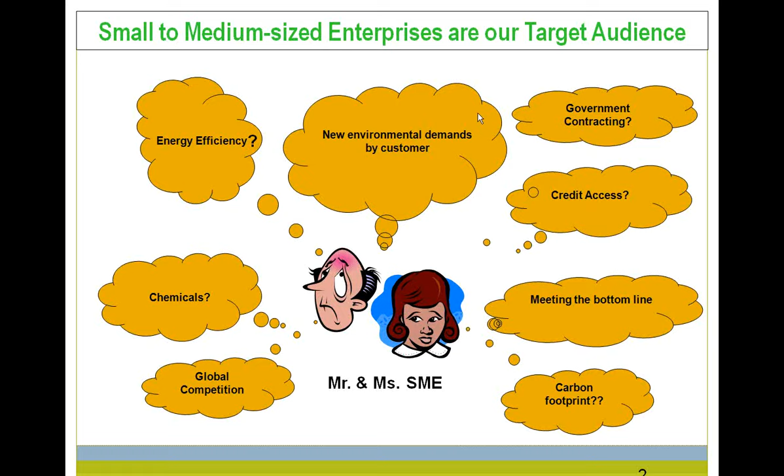I'd like to start our story by talking about the audience that we typically deal with on a daily basis, and that audience for much of our program here are the small to medium-sized enterprises, or SMEs. The reason why we deal with these small to medium-sized enterprises is because they really do need a lot of technical assistance. Many of them are very small companies down within the supply chain dealing with a variety of different issues that you see in the clouds here. I think some of those issues are expanding, and with each coming year there are new things they have to deal with, and they're often looking for technical assistance from a variety of sources, not only industry but also from the federal government and state governments. So that's primarily where we focused our attention.

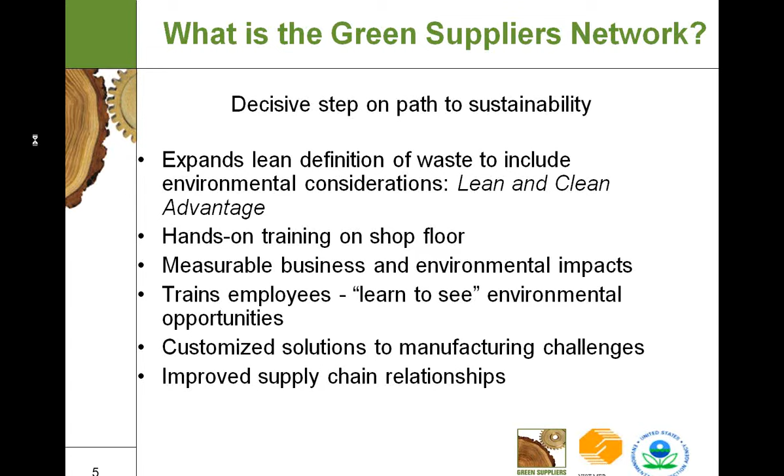And it also is a way of improving supply chain relationships between them and the customers that they provide their services and products to. An offshoot of our earlier efforts, and this is an organization that many of you on the phone know about, you're members of, is the Suppliers Partnership for the Environment.

and our various databases, etc., with industry. This particular organization is now anchored by Chrysler, Ford, and General Motors, and more recently just brought on Subaru, Nissan, Hyundai, and Honda as the original equipment manufacturers. But the real power of this group is the fact that at one table you have small to medium-sized enterprises and original equipment manufacturers that can deal with and discuss a variety of different environmental issues.

So this group meets on a quarterly basis. It's also the foundation for work that we're now doing through the CEC in Mexico, and also beginning conversations in Canada to green the automotive supply chain.

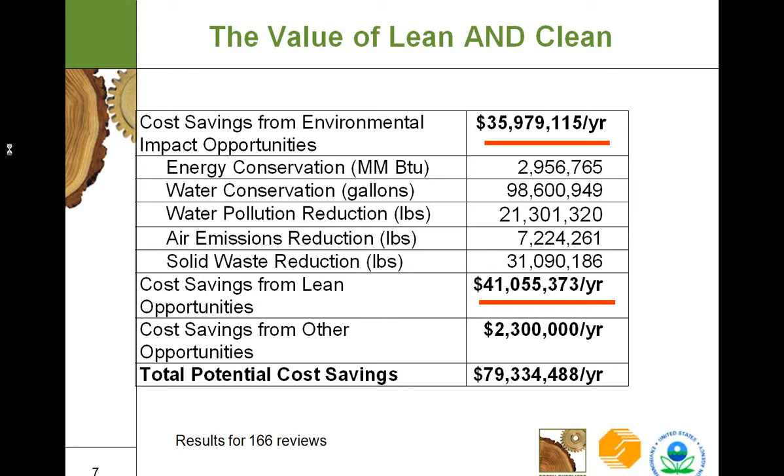Steelcase took this information. They've done two things. One is they've taken it globally to all of their plants around the world on this particular process so that they can benefit as well. And they also then took it to their supply chain so that their small suppliers could benefit as well.

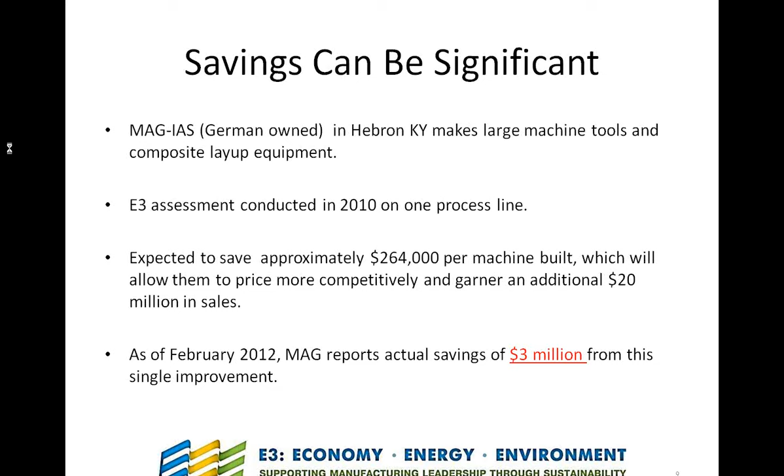Here's another example in Hebron, Kentucky, where Green Suppliers Network was done again. Assessment was done again at a very large company, MAG IAS, in this particular situation, and one recommendation from one process realized for them $3 million a year just from one particular improvement, and you can see what that meant in terms of future sales for them as well. So it's a concept that seems to work quite well. A lot of companies have been using the Green Suppliers Network and continue to do so.

But this journey to sustainability doesn't sit still very long, and a lot of companies out there found that they needed something different, better, more expanded. So we responded to that with a new framework that we call E3, or Economy, Energy, and the Environment. And basically at the core of E3 is the Green Suppliers Network, Lean and Clean.

What we have done is reached out here in the United States to a variety of other federal agencies, all of whom are working with small to medium-sized enterprises on sustainability efforts, and we've simply brought those together. We've always worked with Department of Commerce, with NIST, the Manufacturing Extension Partnership, but we've also added now the Department of Energy, the Department of Labor, the U.S. Department of Agriculture, and the Small Business Administration.

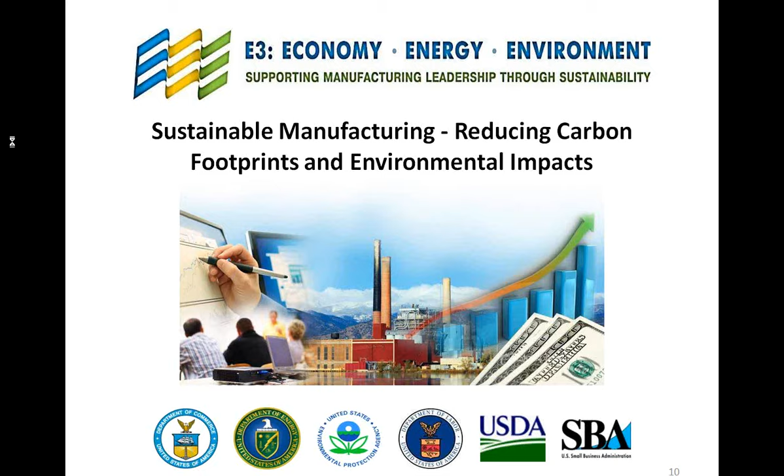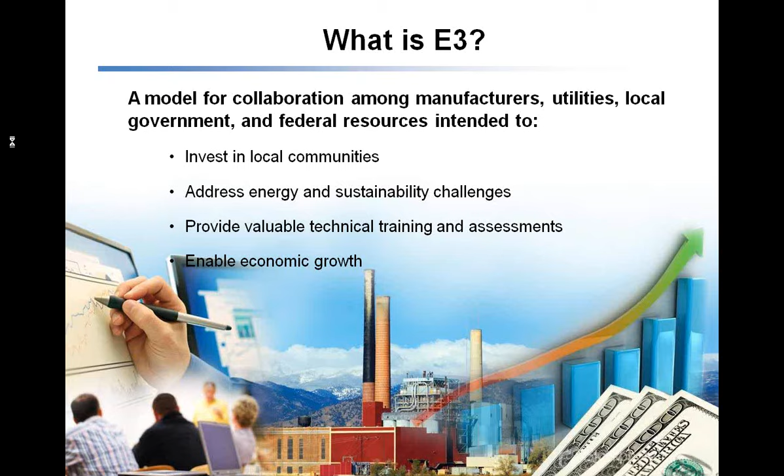So all of those agencies now are working together at the federal level to expand this Lean and Clean to something bigger. We like to think of E3 as a model. It's not a program. We call it sometimes a framework, where we can bring together people, manufacturers, utilities, local governments, and the federal resources I mentioned. It's a way of communities investing in their local manufacturing base, addressing sustainability issues, and helping those communities and manufacturers grow.

It's a novel concept with a very simple idea: the less money manufacturers spend on waste, the more money they have to spend on hiring new employees, adopting new innovations, or expanding markets. One example is a small company in San Antonio, Texas, that found, having had an E3 assessment conducted at their facility, that they were spending entirely too much money on energy. After responding to the recommendations from E3, they brought that in check, and they were able to triple their workforce over the course of about 6 months. So again, a very simple concept that can have significant value to manufacturers.

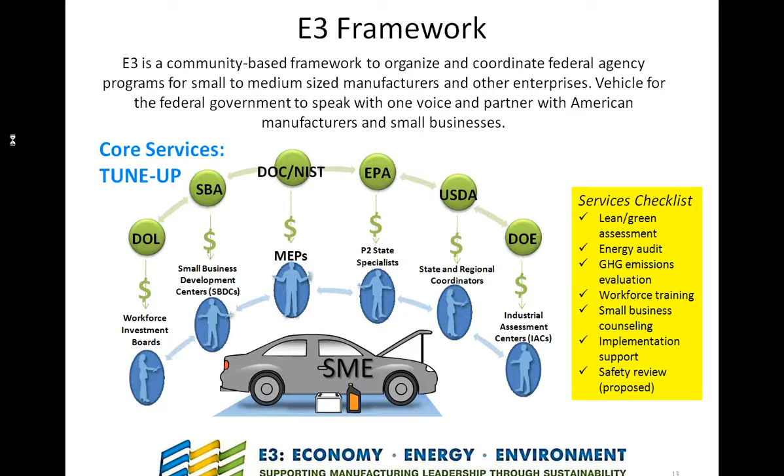So all of those organizations come together, they work with the local manufacturing base, and then they basically provide to those companies what we like to think of as a tune-up. Through the framework, using our Manufacturing Extension Partnership program and other technical assistance providers, we help companies—some of which we're moving from survivability to sustainability—and as we work with them on a continuous improvement kind of operation, we take them from basic sustainability up into situations where they free up enough capital to become more innovative, expand their markets, hire more people, et cetera.

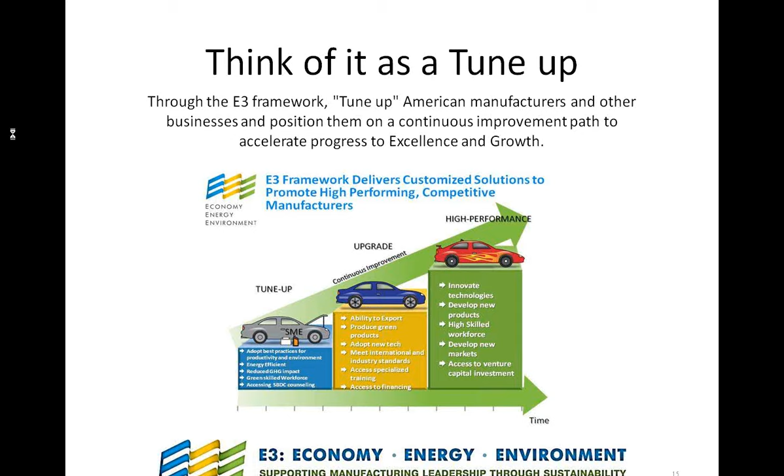Benefits for manufacturers are pretty straightforward. I've mentioned the cost savings. It has, for many manufacturers, increased their competitiveness, created jobs, and continues to create jobs or helps companies retain jobs. It also provides access to a variety of technical and financial resources, not only those that might be available, say, through the Small Business Administration, but also financial resources in the form of rebates from local utilities as companies begin to upgrade their energy usage.

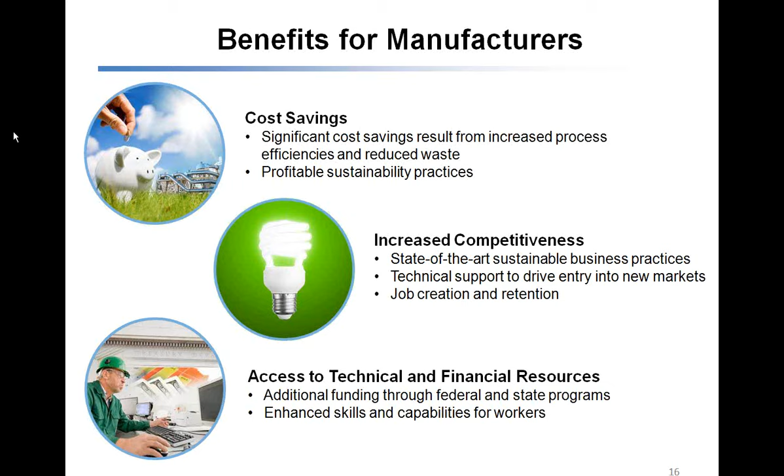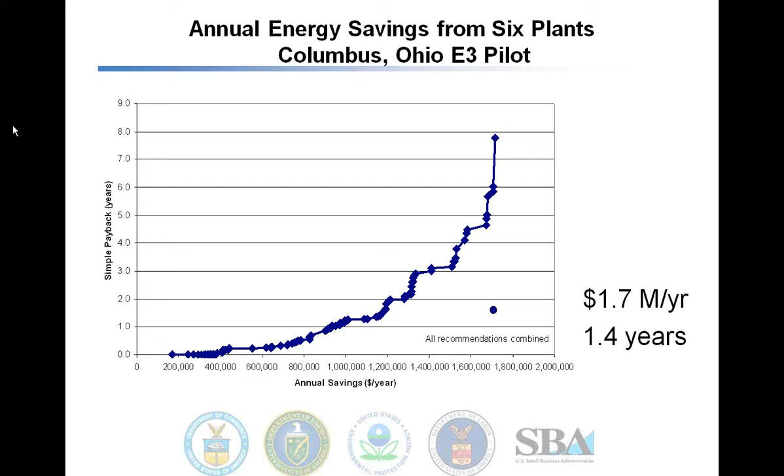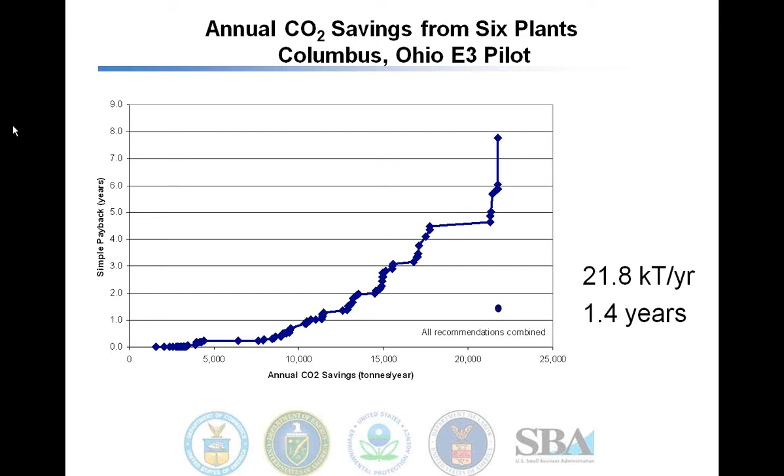Just a couple quick slides. I put these up to show the return on investment. Each company that becomes part of the Green Suppliers Network or E3 pays a modest amount for the assessment, kept low because of how it's subsidized in the United States. In Columbus, for 6 plants, an energy audit predicted these companies would realize $1.7 million a year, with that return coming within just over a year. The same holds true for carbon dioxide, so a 1.4-year return on investment is very acceptable.

I wanted to bring you back to this slide to show you that by doing an E3 assessment, where we do a much more expansive energy audit, and predicting results if we looked at the 166 companies we had earlier, the Department of Energy said we would probably see another $40 million per year. So we're now doubling the lean benefits, making the value to companies much more substantial.

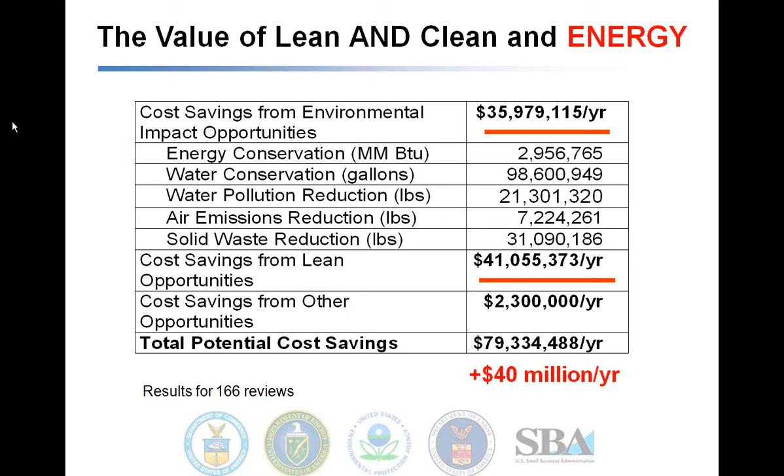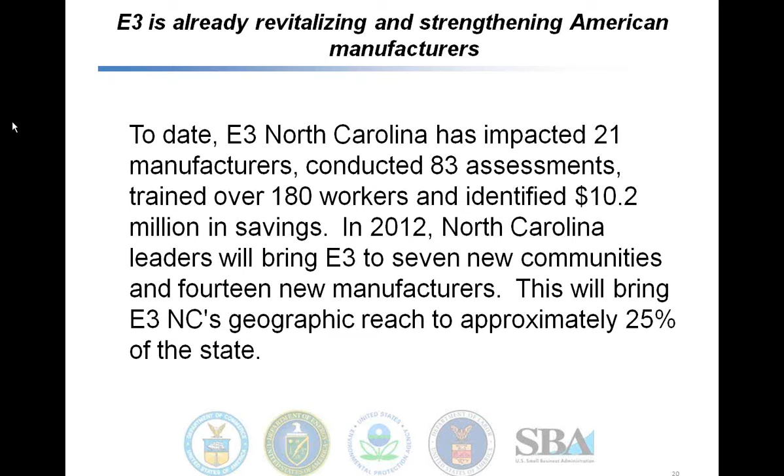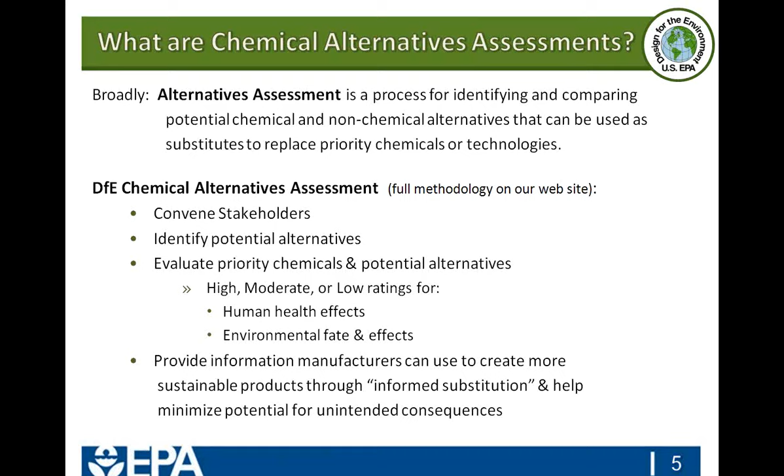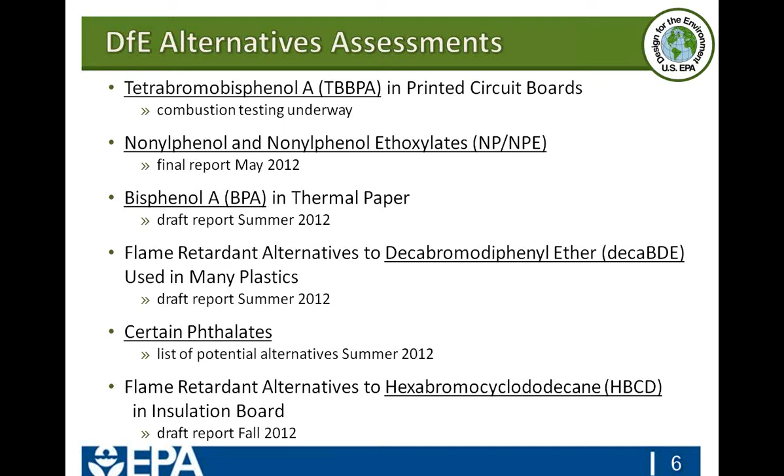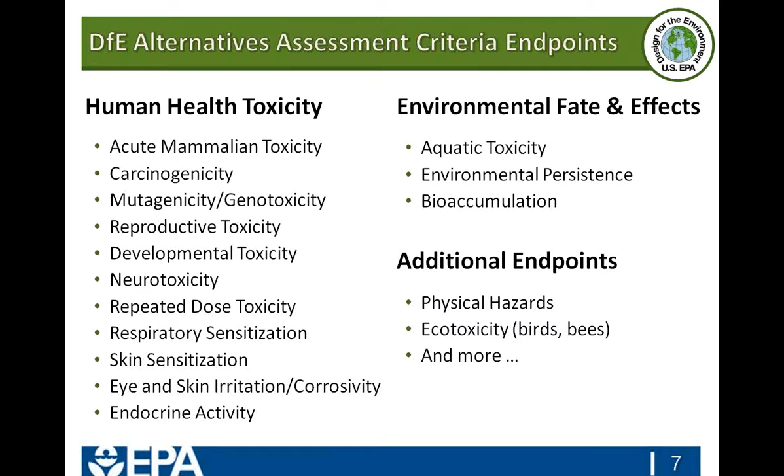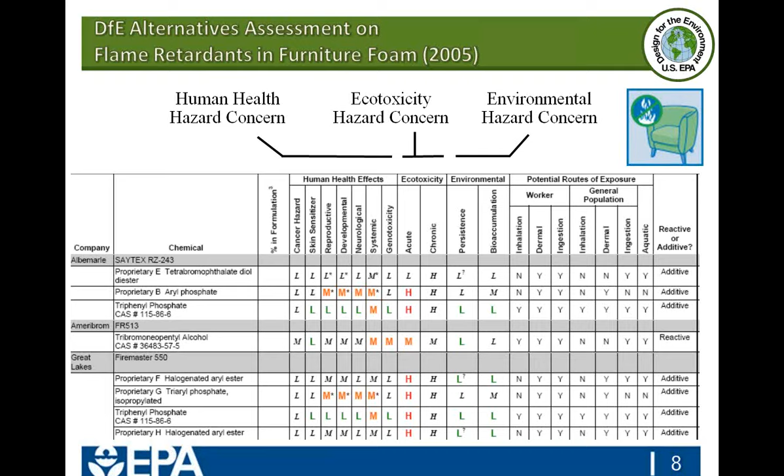So the hazard profiles for these 3 alternatives are on the right-hand side. Wherever we have data, those squares are the colored squares. Whenever data was not present and we had to model or use our best estimate, that is in italics and in black. L means low hazard, M means medium, and H is high hazard. The thresholds and our criteria for determining what is low, medium, or high can be found on our website.

This, I feel, is maybe of interest to you. There is a growing community of practice in the alternatives assessment world. People and companies across the globe really are turning to alternatives assessment as a way to find alternatives without jumping to that unknown chemical and making an uninformed substitution, having to reformulate again and again. It's better to know where a chemical stands on the hazard spectrum before switching to that from another potentially problematic chemical.

Additionally, I want to highlight companies such as HP and Nike. They have alternative assessment programs, and PINFA, which is a European Flame Retardants Trade Association. I just heard, too, that maybe Ford is looking at working with the Green Screen. So it sounds like the auto industry is starting to get involved here. Oh, and additionally, we do have auto representatives on these alternatives assessments. I should have mentioned that earlier.

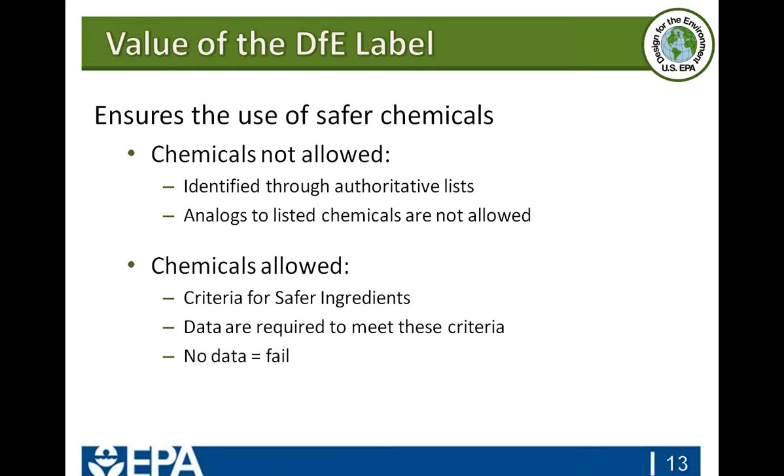Where these companies additionally, in addition to developing new chemicals, are going one step further and getting the testing on these chemicals done. And often that testing, as you probably know, is very expensive.

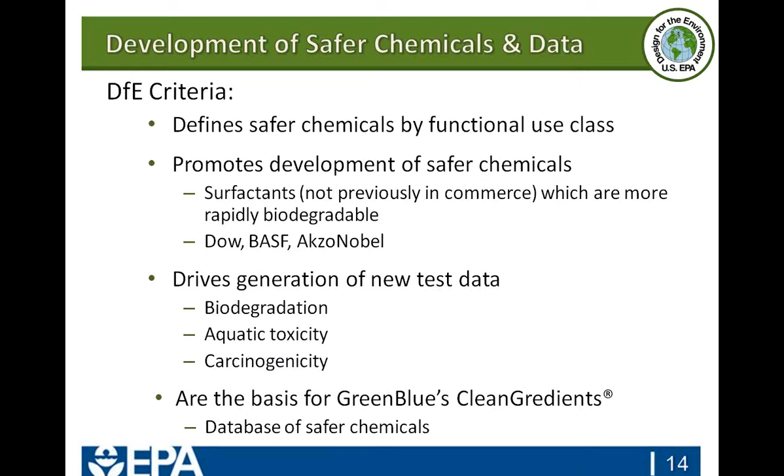We also have partnered with an NGO called GreenBlue. They have a database of safer chemicals called CleanGredients. And do I have a snapshot of it? I don't. But basically, that database is a place for product manufacturers to turn to when they're looking for a safer solvent or a safer surfactant.

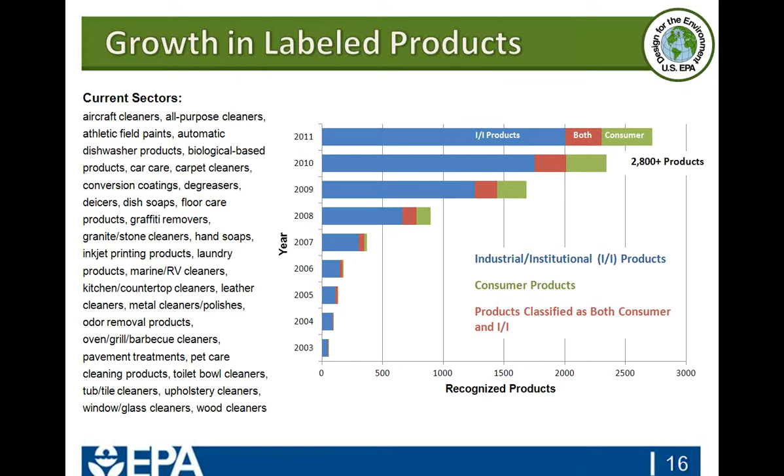Here's our current sectors. As you can see, there's quite a few, and the graph on the right shows our growth and number of products.

Thank you, and feel free to contact me if you have any questions about the alternatives assessment partnerships or the Safer Product Labeling Program.